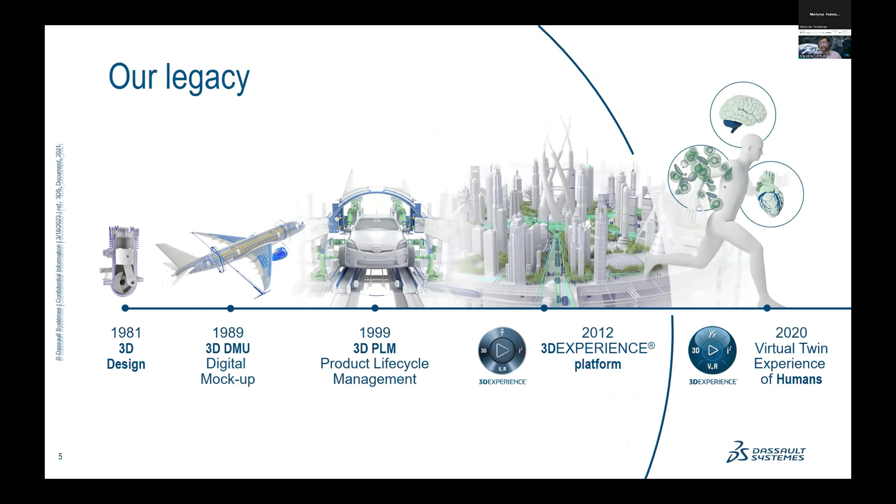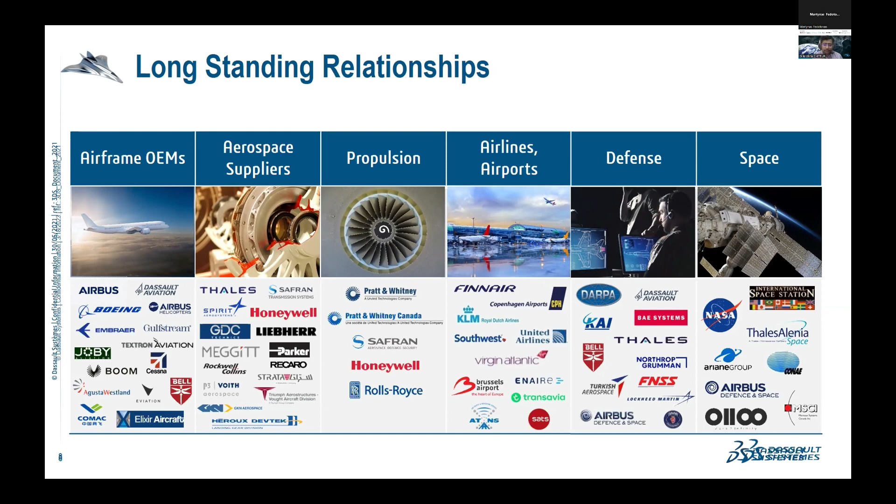Now we have grown massively across multiple domains associated with engineering product development. So Dassault Systemes, in very simple terms, provides business and people with 3D experience universes to imagine sustainable innovations capable of harmonizing product, nature and life. What does that mean? It means we offer end-to-end solutions which allow you to innovate faster, cheaper, and better than your competition. We've had long-standing relationships in the aerospace and defense industry, and space is definitely one of the key segments we are involved in, going from ground operations to components and subsystems to satellites and launch vehicles.

Given the amount of time we have, I thought we would use this session to talk about some of the key innovation challenges, especially being faced by a lot of startups who are into satellite design. This would be a good example. Obviously, the solutions that we offer extend much beyond satellites in the space industry.

To give you some context, the democratization of space is clearly evidenced by the explosive growth of the satellite market. Space hardware is available at lower prices, attracting a growing number of customers and leading to the creation of startups and spin-offs. There has been an exponential increase in CubeSats launched since 2003, yet the mission success rates averaged only 45% for academia and about 77% for industry between 2003 and 2014. Some of the common causes of failure included communication system failures, power issues, deployable issues, part quality availability, launch schedule pressures, launch delays, and so on.

Keeping that context in mind, I thought we would take a look at some -- definitely not all -- of the challenges that you as a satellite maker would face during your innovation process, especially keeping some of the startups in mind.

I come from a mechanical engineering design background, so this session is going to be more focused on the design and manufacturing of the components that go inside a satellite system. One of the most common challenges we have seen with a lot of satellite makers is that they have very siloed sets of tools in the engineering design process, and siloed people.

What do we mean by that? There are people working on completely different tools for creating the CAD models, the 3D designs, the 1D models, and so on. Very few, if not nobody, I would say, use the full power of engineering simulation.

It's really funny when I mention simulation. Most people think, hey, is this a guidance and navigation control simulation, or is this an avionic simulation? Yes, those are different kinds of simulation, but there's another class called mechanical engineering simulations.

These are associated with virtually prototyping the parts or virtually mimicking the tests, be it to test the structural integrity of a part, or electromagnetic performance in terms of communication support systems, or thermal management of heat exchangers, or aerodynamics and a few other types of simulations.

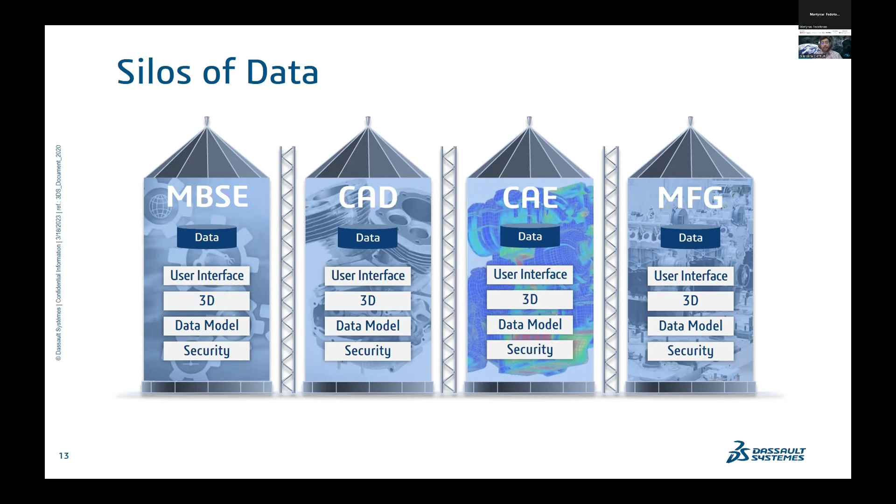As of today, these are very siloed, both in terms of the people who work on it. Either they are within the same company, or contracted out using a completely different set of tools. This makes it very difficult to achieve digital continuity and to streamline the overall development process, because the biggest challenge you have is to get to market faster, to be able to qualify the parts, and to be able to beat the competition.

Our solution is called the 3D Experience Platform. In very simple terms, it brings together all the necessary technologies for developing a part, an assembly, system, or subsystem from scratch, ensuring that it can be virtually prototyped, virtually tested, virtually managed, and even ensuring that it is manufacturable, and providing really cool marketing and sales material out of it by taking nice renderings of the product or the simulation, addressing the needs of design, simulation, manufacturing, product management, where you can capture requirements, and marketing and sales.

So it's an end-to-end business development platform that starts all the way from a paper napkin sketch and goes all the way till the life cycle of the product.

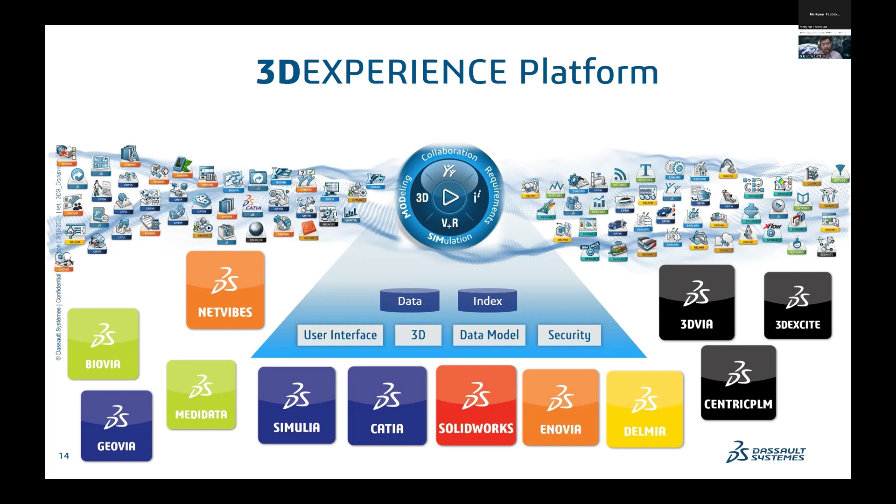This includes all the powerful technologies that have been either developed or acquired by Dassault Systemes, starting from CATIA and SolidWorks for 3D modeling, Simulia for simulation, Enovia for data management of the 3D, 2D, and 1D data, and Delmia for manufacturing capabilities. This 3D Experience Platform essentially integrates or unifies modeling and simulation worlds together.

In modeling, we are referring mainly to 1D, 2D, 3D models, and in the simulation world, we are referring to both 1D as well as 2D or 3D simulations, to get real insights of how your products are going to perform in action or in a testing environment, even before the products are developed.

We've been working with industry leaders for quite some time who have adopted, or who are in the process of adopting, this MODSIM approach on the 3D Experience Platform, which they believe is a catalyst for transformation.

Some of the key benefits offered by this platform include digital continuity, where you can start all the way from requirements, design your products, or bring products from your suppliers. It could be CAD models in various formats, perform engineering simulations, come up with assessments, do design exploration of thousands of designs upfront, to minimize the cost of physical testing, and to not have to wait until you hear from a qualification test.

It eliminates a lot of rework, and most importantly, it's one single application for multiple phases of product development.

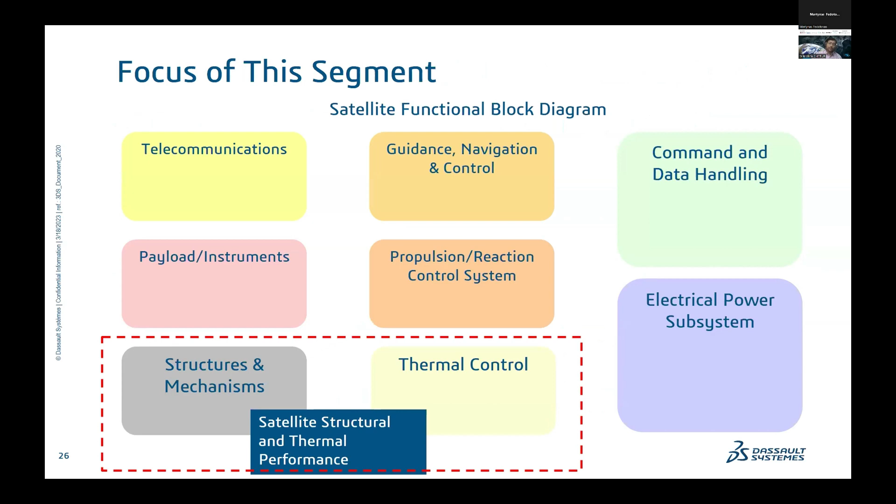The most important challenge that a lot of people in the aerospace and even automotive industry deal with is lightweighting. For example, if you look at this satellite functional block diagram with various subsystems, the most relevant ones to this session are structures and mechanisms, and thermal controls. So here we're talking about thermal analysis of racks and arrays, deployment of folded structures, vibroacoustic analysis, lightweighting, and static and dynamic structural analysis to ensure vibrations are minimal, and so on.

So we're going to use the example of lightweighting as a key challenge. Satellite developers strive to minimize weight, maximize stiffness, reduce cost, and optimize material usage. Today, it is often cost-prohibitive to explore optimized parts. It can even be difficult to collaborate across disciplines due to different systems, tools, delays, and so on, and optimization has traditionally required an expert. We want to break that barrier.

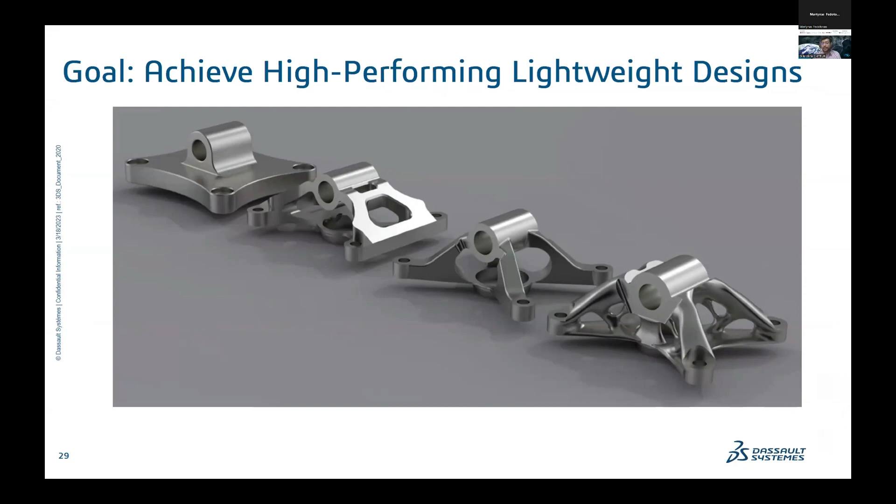The goal is to achieve really high performing yet lightweight designs, and that can be achieved through the concept of generative design. Basically, in the past, designers would create shapes based on intuition, expertise, and best practices within the limitations of the tool at hand and also manufacturing constraints. What we have now is a reduced modeling technique where the optimal design is generated by the software based on the specification or specific function of the part, meaning you as a designer can get an unbiased solution that's also manufacturable. So generative design allows you to see what your shape wants to naturally be based on its functional requirements or load paths.

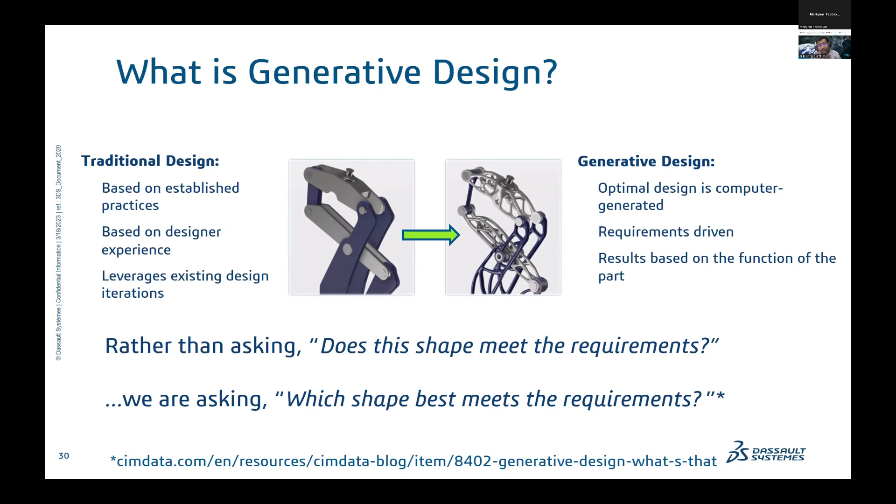This is just one example for me to introduce the concept of MODSIM. MODSIM is basically the unification of design, simulation, and optimization in a single environment. On one hand you have modeling, and on the other hand you have simulation, but right now they are kind of siloed. Either companies, especially startups, contract it out or they don't even do simulation. The workaround is they either over-design a product, or they rely on experience from senior or previous engineers, which is okay, but you need to capture that experience and also break these barriers. That's where the MODSIM approach comes in, where you have design, simulation, and design exploration in one single environment. Let's take a look at this example a little bit deeper.

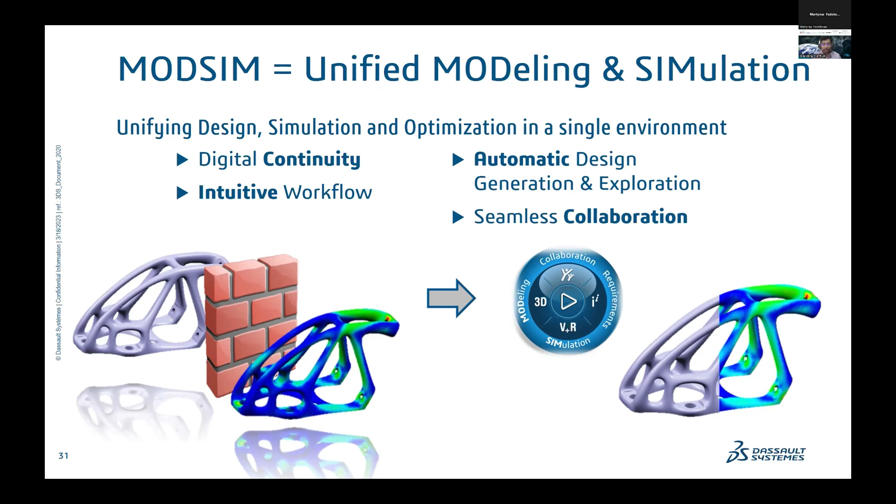Here are three versions of a satellite bracket design. Each meets the necessary structural requirements.

However, the legacy or baseline design you're seeing on the left-hand side weighs about 414 grams. Now we used a generative design solution where we're combining design and simulation worlds together, and the optimization. So a lighter version is developed that can actually be manufactured with standard machine milling.

The weight is obviously reduced by about 22%, but the amount of material that's wasted has actually increased. So we call that buy to fly ratio, which in very simple terms is the weight of the raw material that's purchased compared to the weight of the final part. And you want this ratio to be as close to one as possible.

Now we could take the third approach where we combine design, simulation, and manufacturing. So if additive manufacturing techniques are also included in our optimization process, then the design can be further optimized. So the weight savings is now about 45%, and the buy to fly ratio is significantly reduced.

So this bringing of modeling, simulation, manufacturing, all the domains together, that's what we call MODSIM. So you're not using different software tools, you're using one single application or one single user interface that brings various applications together, with minimal expertise needed in specific fields. Yes, you need to understand the functional requirements of the product, but you can get up and running.

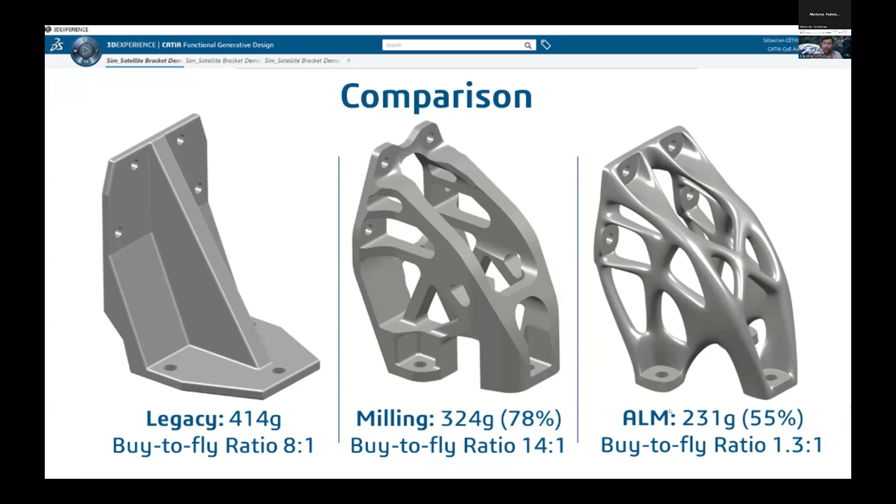Just like there is a huge democratization era going on in the field of space, we are experiencing a democratization in the field of engineering design software solutions. So this is a classic example where we are putting these really powerful tools in the hands of a designer who just knows what is the functional requirement of this part.

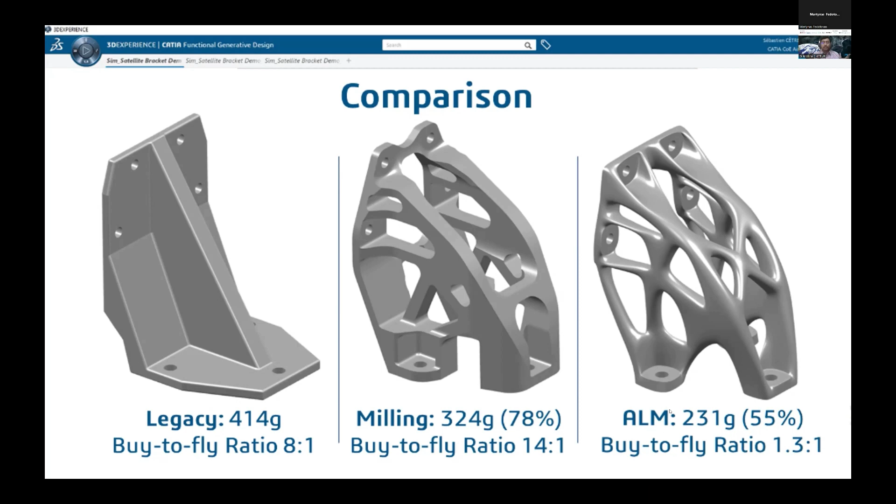Here is a success story from Airbus, where they have actually increased the number of users from 120 up to 500 for this particular application, because now they're putting these powerful tools in the hands of designers who don't have to have a strong simulation or manufacturing background. They have been able to reduce their buy to fly ratio by about 10 times, and their design development time.

And I just showed you one type of simulation, which is structural simulation. We'll talk about electromagnetics in a bit. But overall, their design development time was reduced by a factor of 4, and their weight reduction went from 30%, which was from traditional manufacturing, to about 70% from additive manufacturing.

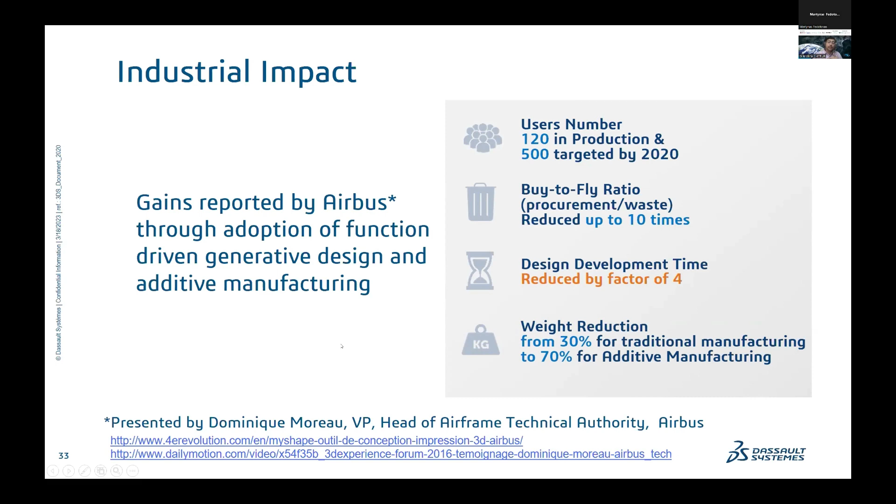Now the best part is you're able to virtually do these assessments even before you go on the shop floor, even before you start building a prototype and then testing. So you're able to reduce the number of prototypes built, reduce the cost, speed up the turnaround time from a design standpoint, and you could even reduce the number of subcontractors involved, especially if you're a startup tight on cash flow.

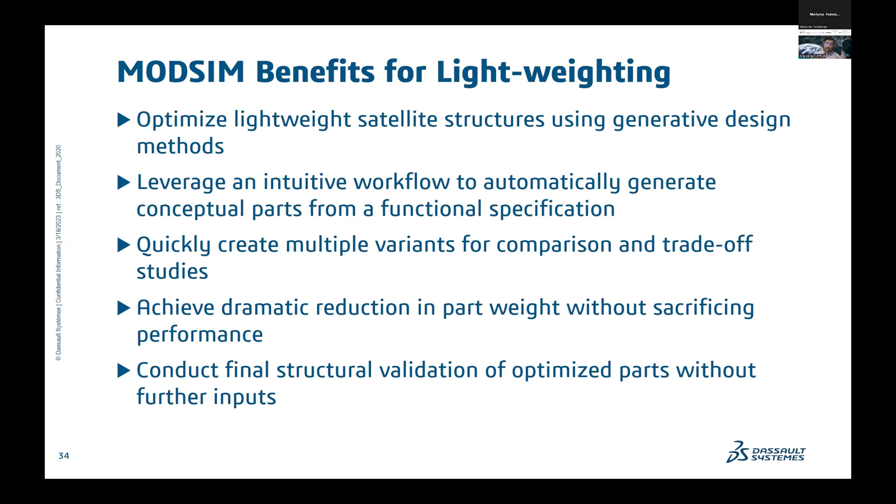So from a lightweighting standpoint, you can very quickly optimize the satellite structures with generative design methods using a very intuitive and automated workflow where you can explore thousands of variants and conduct the final structural validation or physical testing based on optimized parts, without too many iterations going back and forth between design and physical testing and prototyping.

So we talked about two business challenges, one engineering challenge. Let's talk about the other, the elephant in the room, which is communication. Typical questions that a mechanical or electrical engineer is trying to answer during the development of a satellite include the space available to route cables to the antenna.

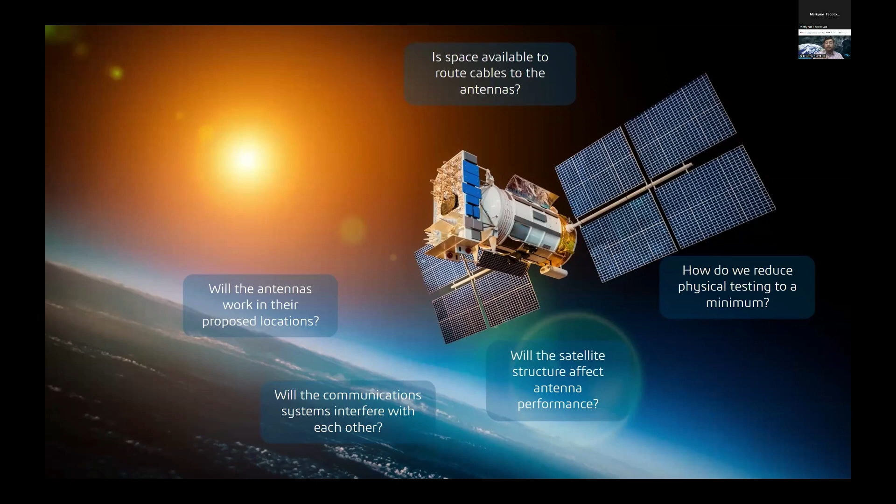How do we reduce the physical testing to an absolute minimum? Will the satellite structure affect the antenna performance, or will the communication systems interfere with each other? And that's actually one of the biggest challenges.

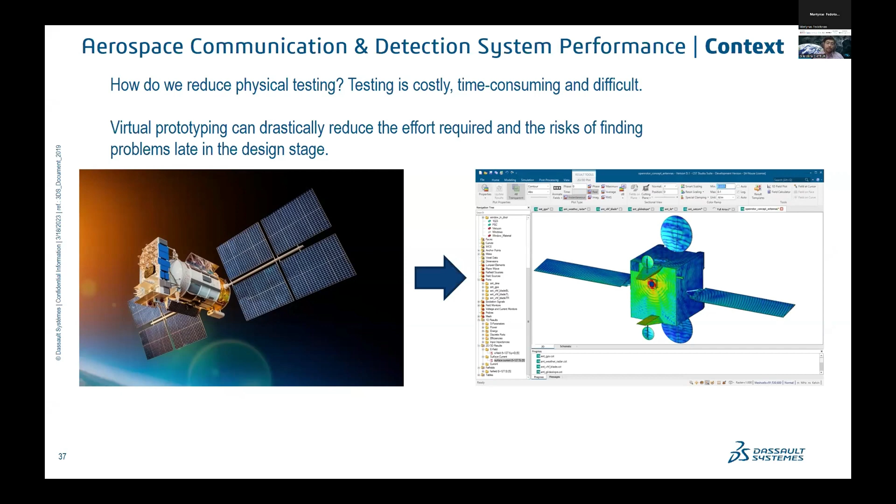Testing is very costly because there are two levels of testing. There's ground testing, and then there is in-flight testing, which is still pretty expensive and will still not give you exactly what you're looking for. So virtual prototyping, or simulation in simple words, can drastically reduce the effort required and the risks of finding problems late in the design stage. So you're able to identify the issues upfront.

So taking the example of communication and detection system performance, this involves antenna system performance, where you're looking at antenna design, placement, and the right location of placement.

Yes, of course, satellite is a mature industry. There's a lot of experience, a lot of know-how, but we are coming with all types of innovation in the world of spacecrafts. So that requires you to change the way you look at how you're placing the antenna, because now there is compactification. There's a lot more antennas being placed on a given equipment. And then there is antenna array design.

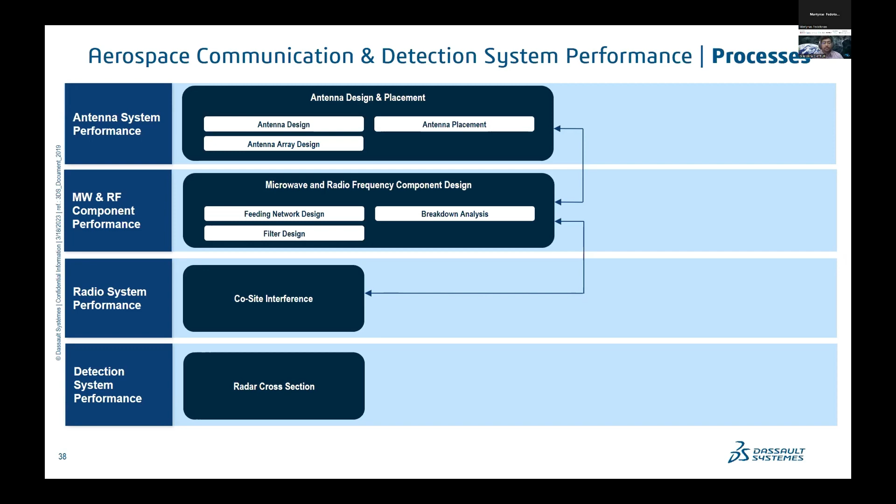That's also a very critical part of this process, followed by microwave and radio frequency component design, co-site interference, which is to ensure that multiple radio systems can coexist without interfering with each other's signal. And then detection system performance, characterized by radar cross section. So you've got all these processes in this place, and Dassault Systèmes, especially the SIMULIA brand of Dassault Systèmes, offers a really complete set of electromagnetic solver technology for antenna simulations.

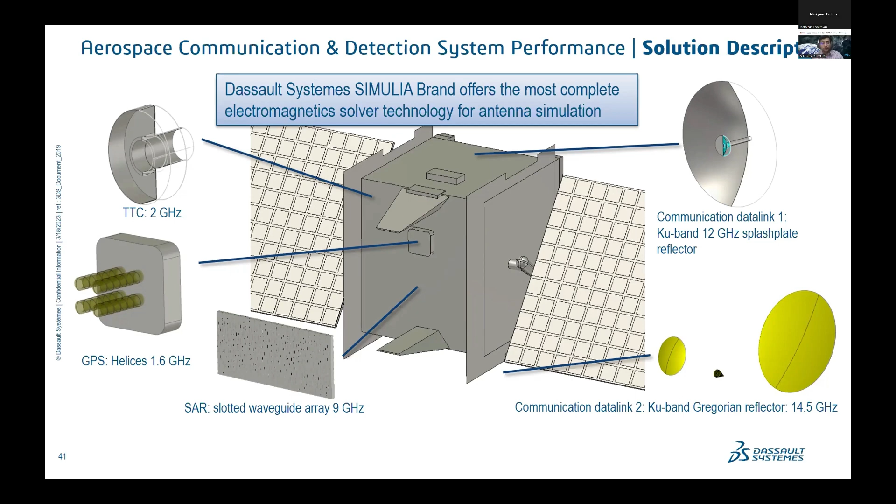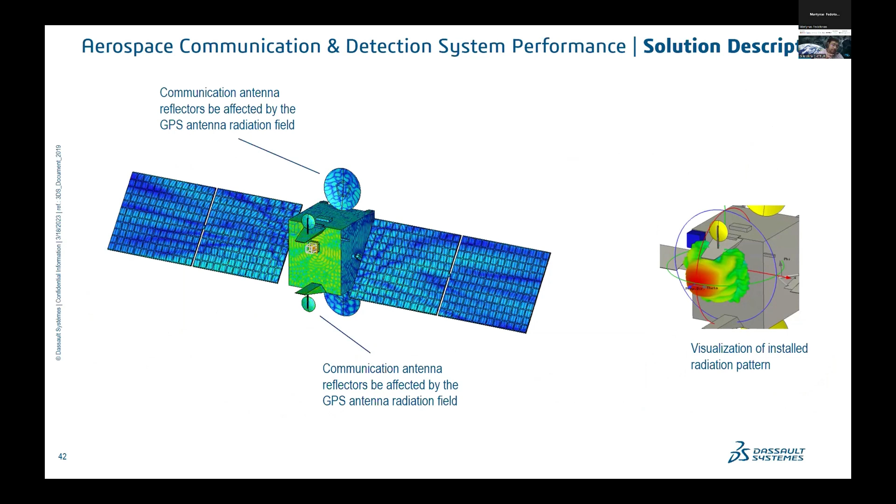This is also on the 3D Experience platform, where you can go back and forth between design and simulation to make design modifications and update your simulation on the fly, to ensure that you get the best design before going to physical testing. You can generate field and surface current visualization that could show how the satellite geometry affects the antenna performance, and you can come up with strategies to minimize any co-site interferences.

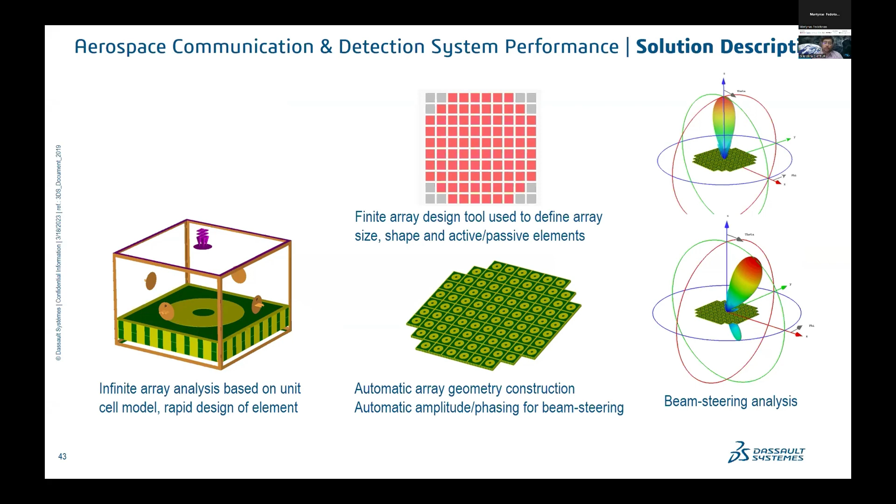There are specialized tools for antenna array design that could allow engineers to quickly estimate, optimize, and validate array performance, both at the cell level and also at the full array level, with a lot of automation that goes behind the scenes. RF interference analysis can be made quite simple, where you can define and simulate radio system coupling performance to analyze results at a glance through the violation matrix.

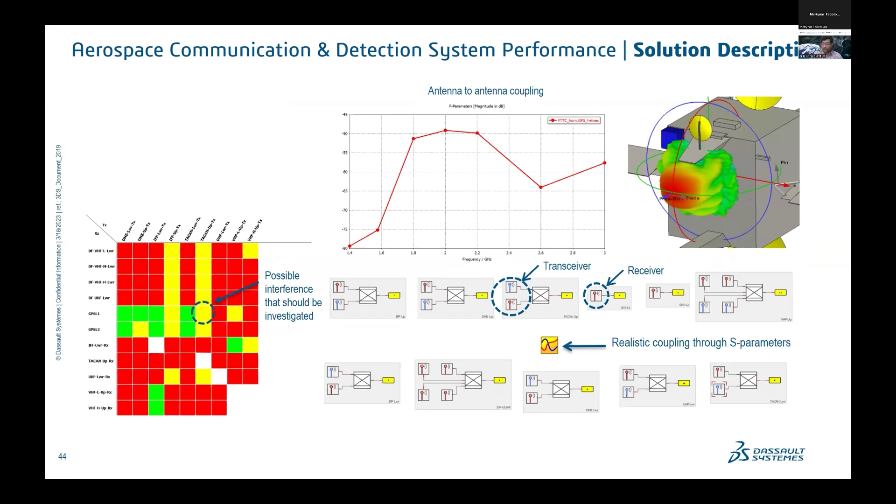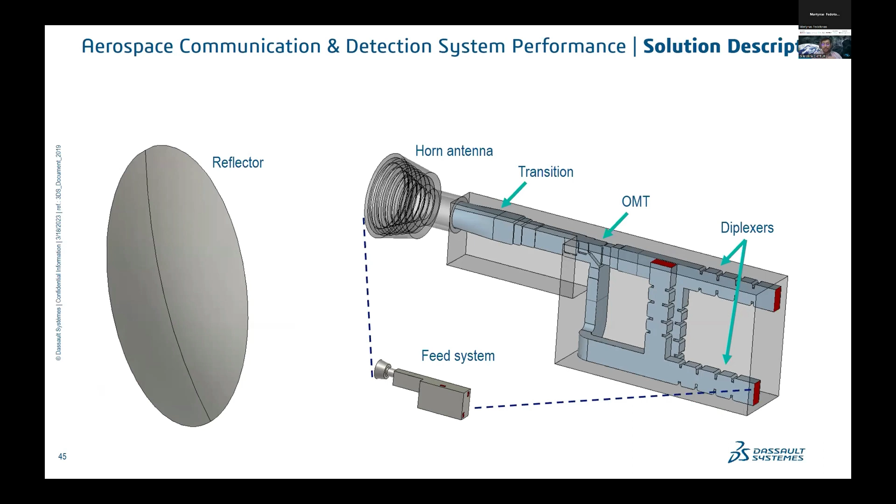High power communication systems, feed system design can be made easier by a divide and conquer approach, where you can split the problem into smaller pieces and use the best solution technology for each part. Last but not least, we have specialized tools for filter design and tuning, optimized solutions in shorter time than the generic simulations.

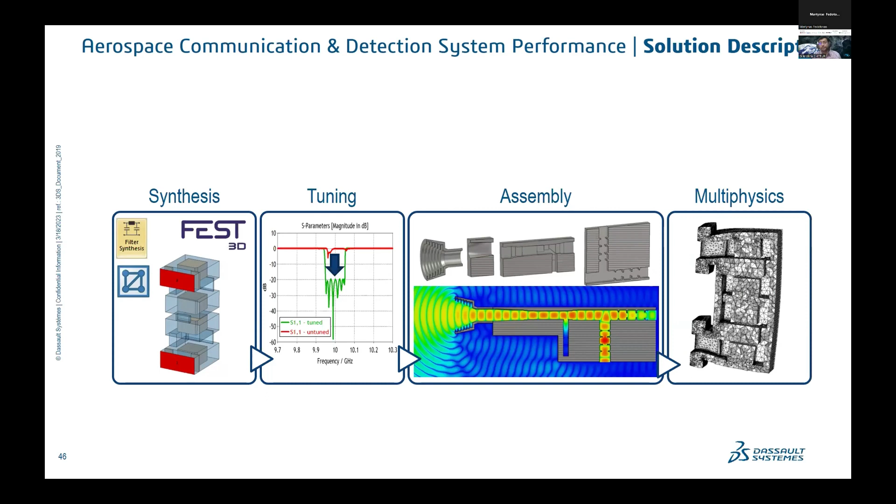So you've got all these really powerful capabilities embedded in a design environment, embedded in a data management and manufacturing environment, that just gives you the full spectrum of the product performance even before it is made. You can simulate, explore the design space, visualize, and optimize the overall installed antenna and feeding system performance.

And this is one of the biggest advantages, which is you're not only getting engineering KPIs, but you can actually visualize how your product performs up in space even before it is built.

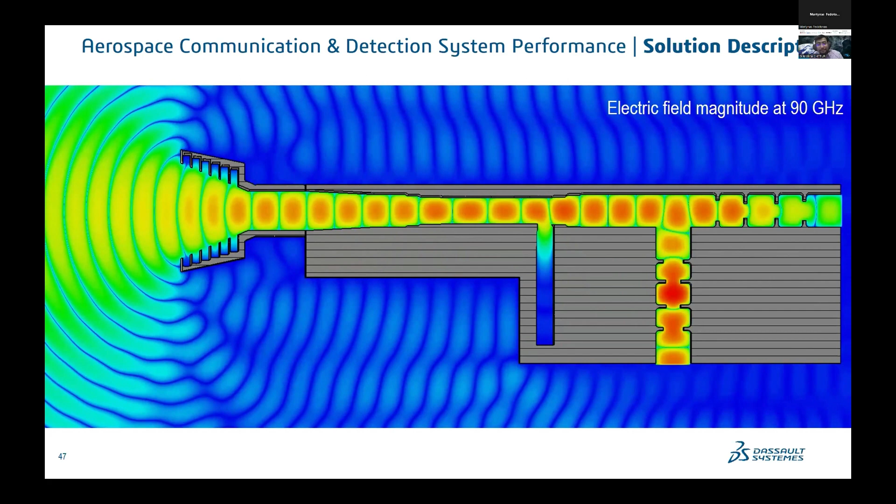So some of the key requirements for a typical communication and detection system would be to reduce the development time, cost of physical testing, improve safety and performance, and reduce risk of failing certification, because you have the electromagnetic compliance, or EMC, that comes into picture.

So the ModSim approach on the 3D Experience platform offers quite rapid and virtual antenna design and validation tools, where you can place antenna in various locations, assess, and then come up with the most optimal placement without having to even do it on the real prototype.

You can minimize the in-flight and ground-based testing. You can ensure the performance and reliability of coexisting communication systems by minimizing the co-site interference, and leveraging high accuracy simulations. You could reduce the risk of failing certification tests, which could put you back in time, effort, and money.

To sum up, we've just talked about a few of the challenges. There's a lot more, but in the interest of time, some of the key innovation challenges that could be addressed with the ModSim approach on the 3D Experience platform include...

...accelerated innovation from idea to first launch, by breaking the silos and innovating on one single platform, quick deployment, scalability, and optimized total cost of ownership offered with a cloud solution. We also offer on-premise, so you have the flexibility, minimize satellite weight without compromising the performance, and reduce the physical testing costs quite significantly. And last but not least, significantly enhance communication and detection system reliability.